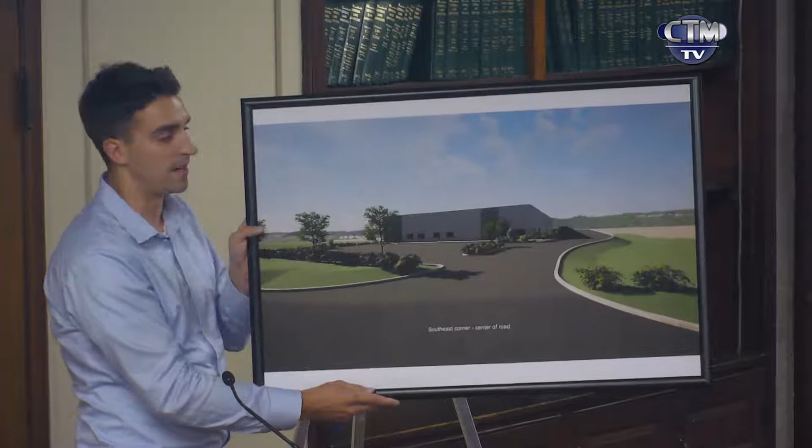I think the board's initial reaction was that we would be much higher, particularly at this view, and some of the concern was specific to maybe seeing the rooftop units, kind of more of a bird's eye view of the site than what it is actually intended to be. So we produced this specific perspective rendering to try and clear up some of that depiction of what it's going to actually look like once it's constructed, specific to the grading. I'm going to flip this open to a few other views that we produced to complement this as well.

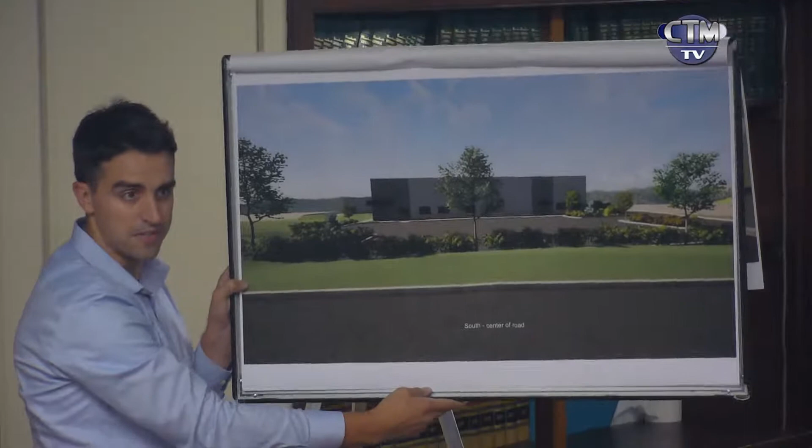The second depiction is further south, pictured from the center of the street. The grade does begin to rise gradually as you depart from the curb cut itself. We have depicted the accurate landscaping as Mr. Stupinski here has designed it to give you guys a better idea of what the actual vegetation is intended to look like. Again, as we rise in grade, departing from the curb cut itself, you can see there's still really little to no visibility of the actual roof structure.

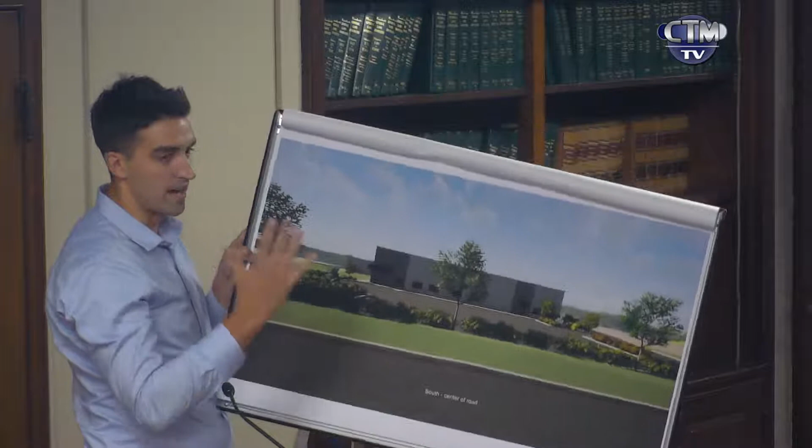General architecture of the building is we have about a 26-foot maximum eave height, and it falls away from there gradually. The front facade consists of insulated metal panel, an aluminum-clad facade with a sandwich panel for thermal envelope performance. This has a very mild striation to it to give it some architectural relief rather than just a plain flat panel. We have some black single skin architectural canopies over the main entrances.

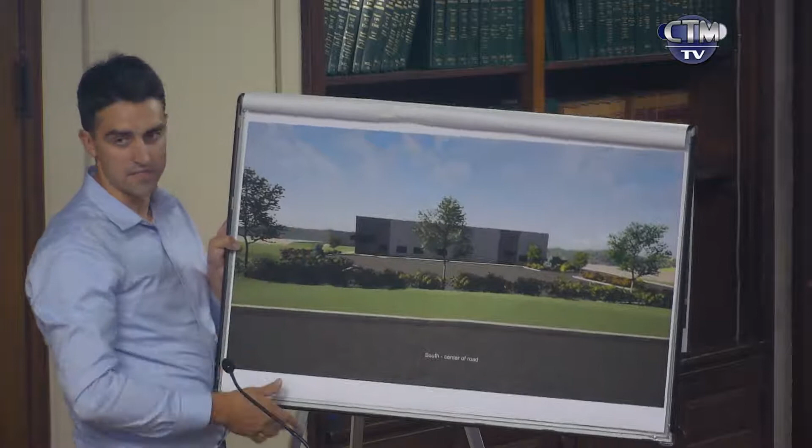It's tough to tell from this rendering, but we have another depiction that shows it a little bit better. We've made specific efforts to create variation in the front facade by switching from vertical to horizontal panels, which I can point out in the forthcoming image. So generally just different shades of grays and blacks is kind of how we're approaching the color scheme here.

Is your grass swale on the left-hand side of that building, as we're looking at it right here? Correct. Correct. Yeah.

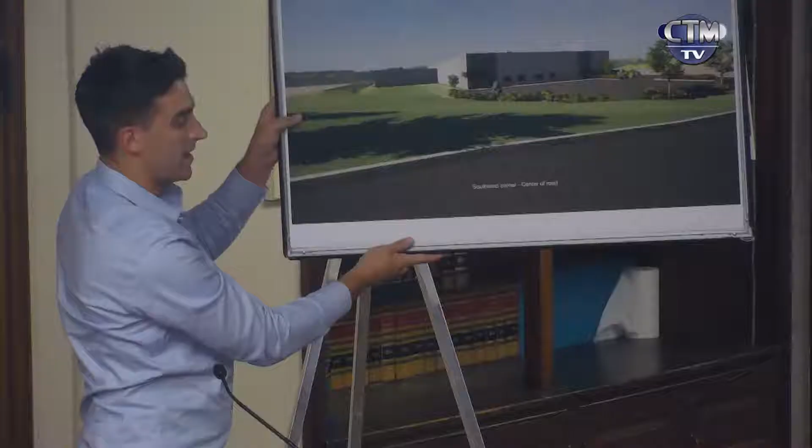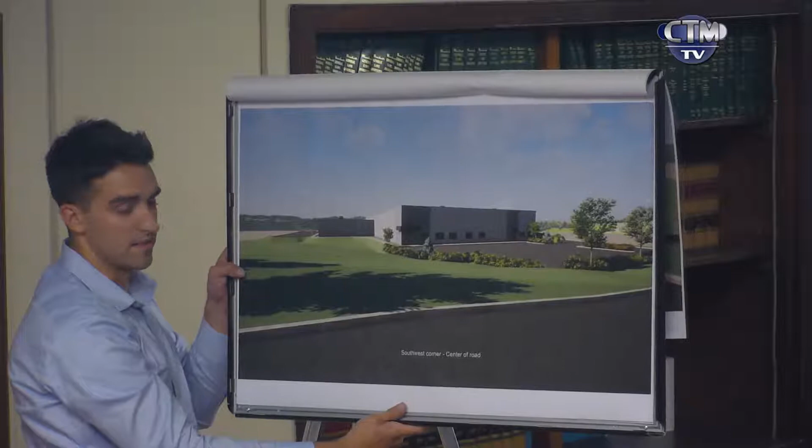This is again a little further southwest corner of center of the street, looking down on the facility. This is really where you hit kind of the maximum elevation in relation to the finished floor of the facility. That 26-foot eave height still rises much taller than the grade itself. You can begin to see the structure that juts out to the left at the back of the facility where some of the receiving functions are. Again, we've gone through and modeled a lot of the topography, the vegetation, the landscaping that Mr. Stupinski has designed to the city's criteria.

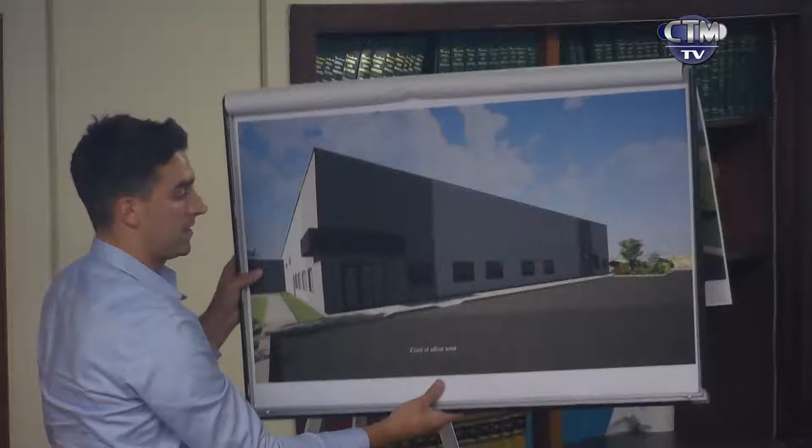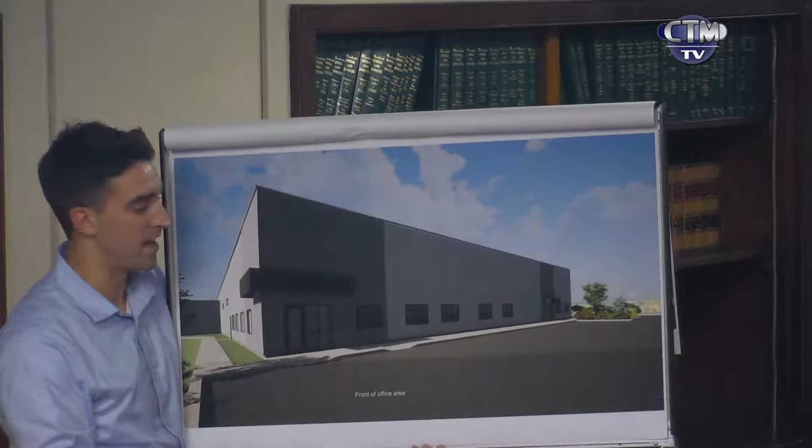This is the kind of enlarged up-close perspective view of the front facade. So you can see at the center point of the facility, we've actually made efforts to swap from the vertical grains to the horizontal grains, which does add cost to the project. It requires a lot of additional backing, framing, and sheathing to accomplish that. But the client felt that it was money well spent to give it some architectural appeal rather than just a consistent facade texture. We've also switched from 2.5 to 3.5 inch panels at those locations to give a little relief to that facade so it's not just a perfectly flat material across the entire front of the building that faces the street.

You can see the architectural canopies in a little more detail that wrap those outside corners and give it some appeal. Those are a different material called a 7.2 panel from MBCI. Still an industrial type of look, but brings a little more of a high-end architectural taste to what is a more consistent facility down the longer stretches of the building. So that's that.

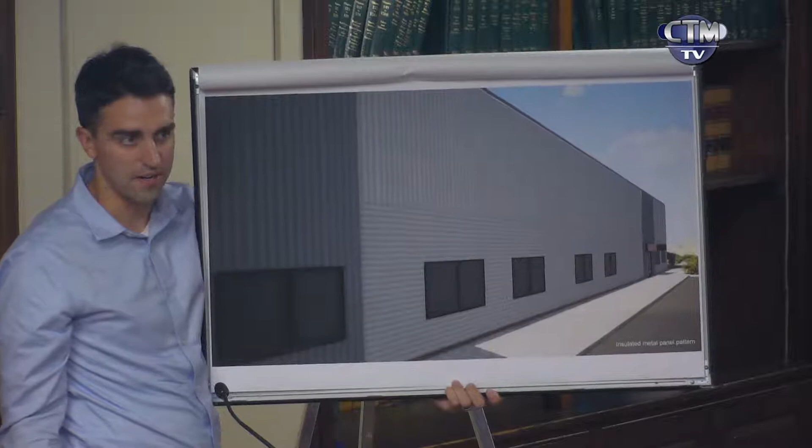To give you guys a really good depiction of that material in the insulated metal panel and that aluminum contour, we've done a really close-up, high-resolution rendering to show you what the color depiction is intended to look like, what the different striations in the paneling look like, and how the different vertical and horizontal configurations break things up to make it interesting to the eye.

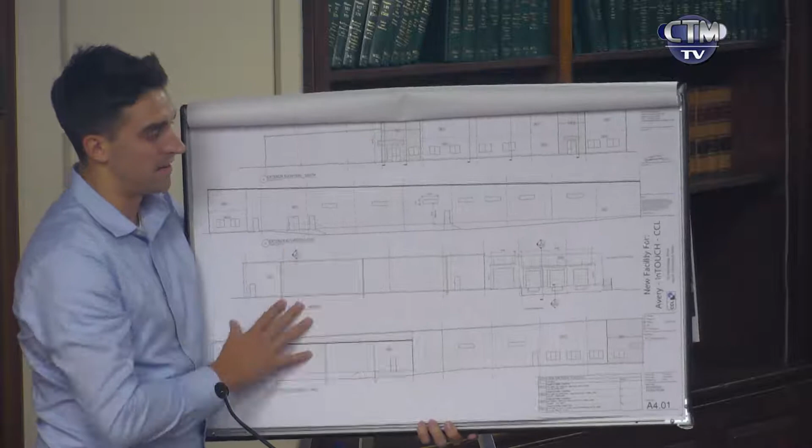So those are the perspectives that we produced to help the board visualize the intent we were reaching for. We also have some of the exterior elevations, which have been submitted to the board for review and brought to the last hearing. We took the board's comments to heart and went back and spent some time and effort putting a little bit of color and perspective into context with those renderings. That's pretty much the gist of it.

Thank you. Do you want to read the letter now? Yeah, I can read the letter.

We have a letter here from the Chelmsford Fire Department, Fire Prevention Office, dated August 11th, 2021. Dear members of the board, the Fire Prevention Office has reviewed the proposal for a new building at 10 Technology Drive and finds the following: Water supply appears to be adequate. The required pressure and flow shall be confirmed by a current water flow test performed proximate to the site, with all calculations submitted to this department for review and approval. The applicant shall coordinate with the North Chelmsford Water District to arrange the flow test. Hydrant locations shown on revised plans are adequate.

There are 2 hydrants proposed on the submitted site plan, and the project engineer relates that the fire department connection will be located at the point where the fire service main enters the building. The fire department connection shall be of a 4-inch storz type and shall be located on the Technology Drive south-facing side of the building. The developer shall provide paved access to the fire department connection, which must be always maintained. The Fire Prevention Office requires a hydrant within 60 feet of the fire department connection and will require a second hydrant in the rear of the building near the loading dock, which is currently provided for. Hydrants and fire protection equipment shall be free from landscaping obstructions.

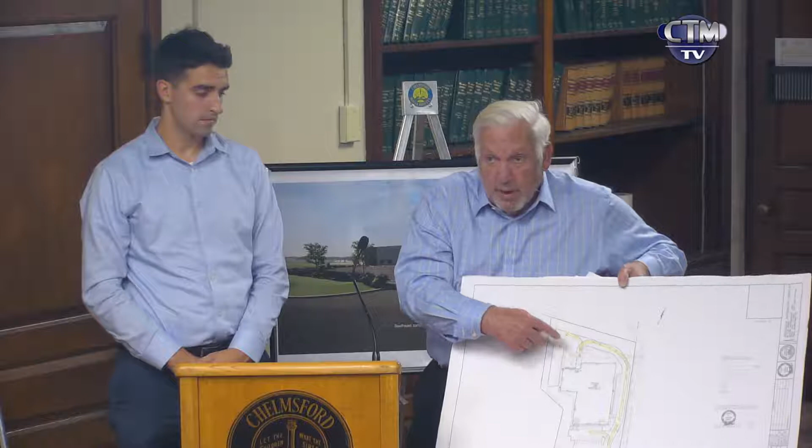We do? Okay, because I'm looking through and I don't see it. Yeah, when I submitted it to the fire department, I copied Evan and Colleen. Did anyone else see it? I hadn't looked at that particular detail, but this description seems adequate to me. I do remember we had a conversation about adding the swept plans to our docs.

So Evan and Colleen, do you know if we have that swept plan? And in the future, if there is one submitted, could we please get a copy of it to look at?

I'm actually going to pull it up in just a minute. Did you send it out to us prior? So I don't see it, that's why I'm curious. Did you have it last time? No, this is a change since updated last time. It's an updated one.

I don't remember seeing it last time either. Is it in any of these updated plans that we have on the table here? Maybe it's in this one. He said it was online, that's why I'm looking. I'm sure you submitted it, I'm just looking through there, and if they knew where it was ahead of time it would help.

It is what it is. Let's move on to the next while they're looking for that. Nancy, do you have anything? He's got the full plans here that were just left in front of us.

These are just the site plans. Lights, not yet either. We haven't got the lights concern.

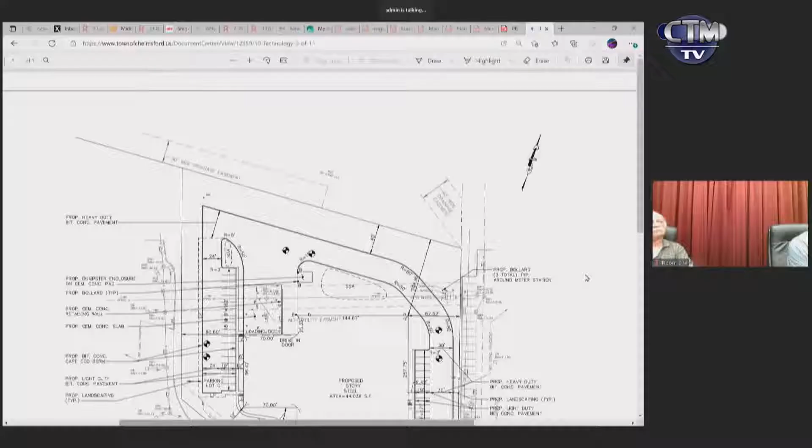So what I'm concerned about is parking lot C at the upper left-hand side and parking lot A at the bottom, in terms of having enough space for the parking spaces at the end of those lots to back up, turn around, back out, and proceed. I'm not really seeing dimensions here that would support the ability to do that.

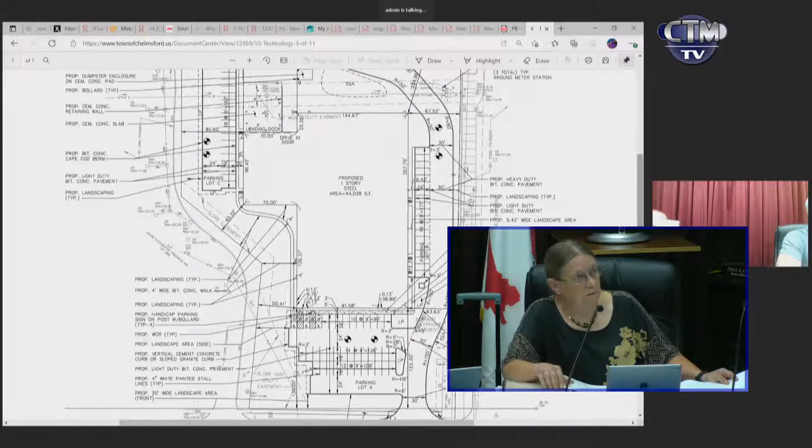And all 3 of these lanes are dead-ended lanes, so we have a requirement that you have to be able to back up and turn around for dead-end lanes. I see your concern. I know that number is 3 feet, which should be adequate to allow an automobile to back out and make that turn.

Can you improve that? You actually see the pavement set back further from that stripe in both lots. Can you increase the dimension on that? It's 3 feet, we could increase it to, I think, 6. Yeah, we could actually do that, increase it to 6. We could do that, and cut down on impervious surface too.

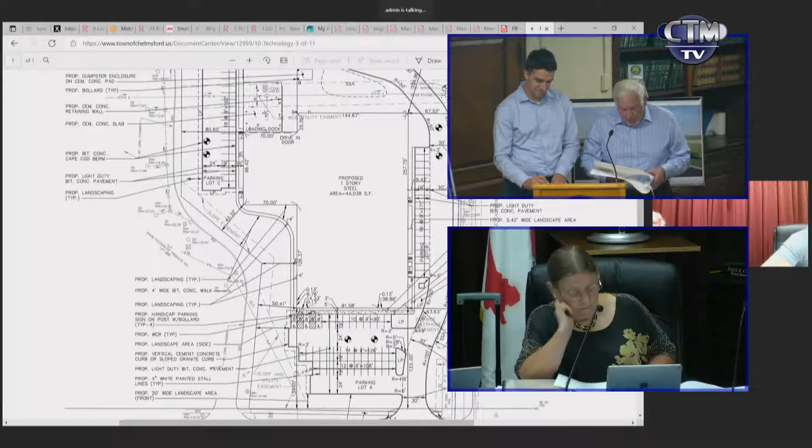Before I say that, let me just look at the grading for a second, I don't want to get in trouble. It may be a grading issue, but... are you asking a question? On parking lot C, increasing it to 6 feet is not an issue.

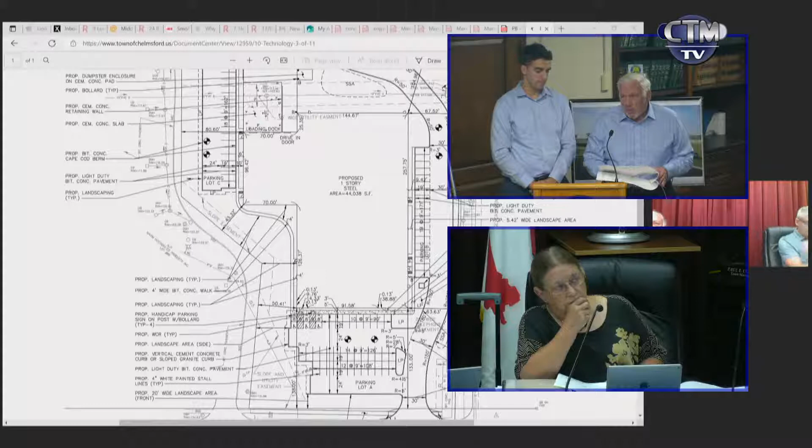I might have to add a small 2-foot-high retaining wall at parking lot A in order to accommodate that. But if we did make it 6, we'd have a small wall there. I think that would be reasonable. Just eliminate parking spots. You could, if you're thinking... We'll have enough parking for the building. Win-win, good.

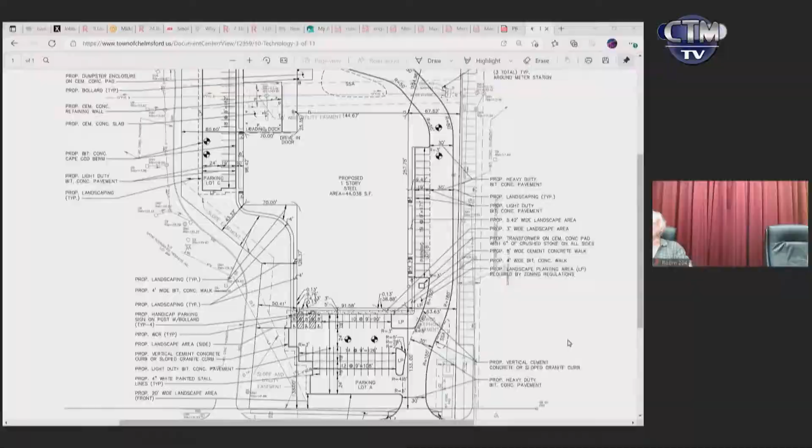Okay, are we all set with that, Nancy? Yeah, except that one of the parking spaces you're talking about eliminating is handicapped. I can move it over. So the handicap spot needs to move over. Okay, so we're all on the same page? Yes. Excellent. Anybody else have anything? Deidre, I did get you, right? Believe so.

Just want to make sure those are parking calculations. Okay, let's open up the public hearing I guess. That's it, nobody else? All right, so we'll open up the public hearing.

Colleen, is anybody on? Let me read the number just in case. 929-205-6099, and we are discussing 10 Technology Drive, and we just opened up the public hearing. Is there anyone, Colleen? Nobody online.

Anybody in the audience? While we're waiting, that island at the end of that strip, is that what you made so you can drive over now with the truck? At the end of C? Yes, Mr. Chairman, if you look at plan sheet 4, you'll see the grasscrete, the crosshatch area. That's the grasscrete, and then there's a detail of that.